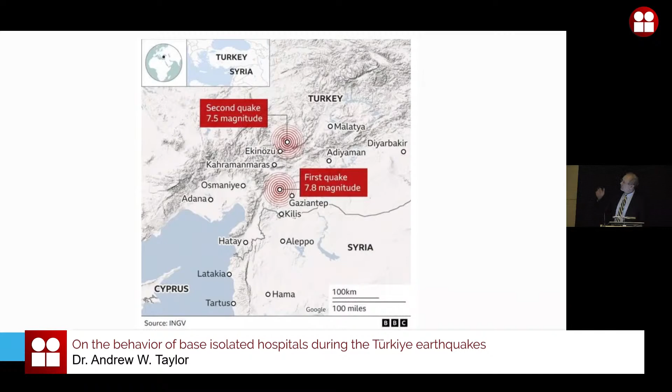So we all know there were two main events. The first earthquake was 7.8 magnitude, and the second, about 9 hours later, was 7.5 magnitude, as shown on this map.

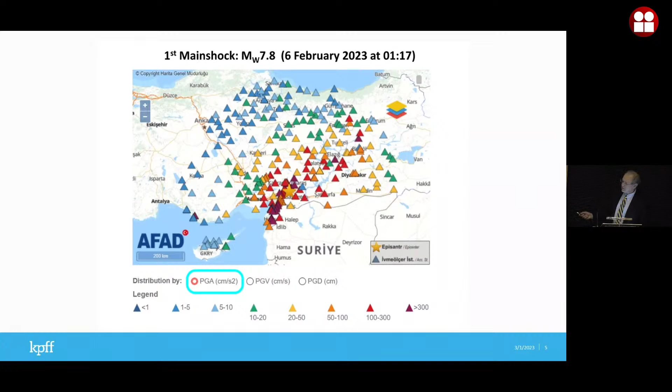In the first earthquake, magnitude 7.8, if you focus on the dark red triangles, these represent centimeters per second squared. Between 100 and 300, or 0.1 and 0.3 G, and even greater than 0.3 G, we see many instrumented locations that measured these very high accelerations. In the second event, magnitude 7.5, we also see many red triangles in the range of 100 to 300 centimeters per second squared or greater. This gives us an idea of how extreme the event was.

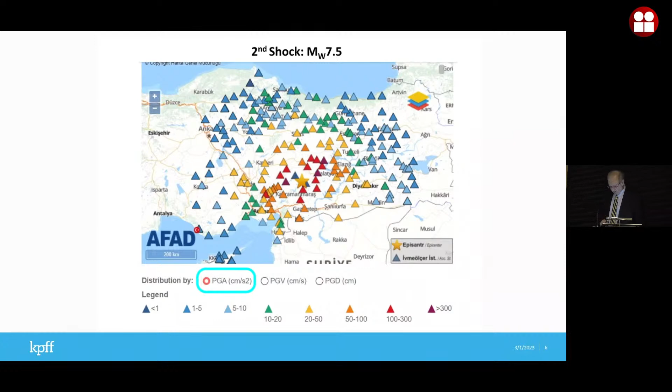I was very interested to learn how isolated buildings behaved in this extreme event. These are numbers from different seismograph recording stations, specifically the 10 closest recording stations to the main event, the first earthquake. We see peak ground acceleration in the north-south direction, east-west direction, and the up-down or vertical direction.

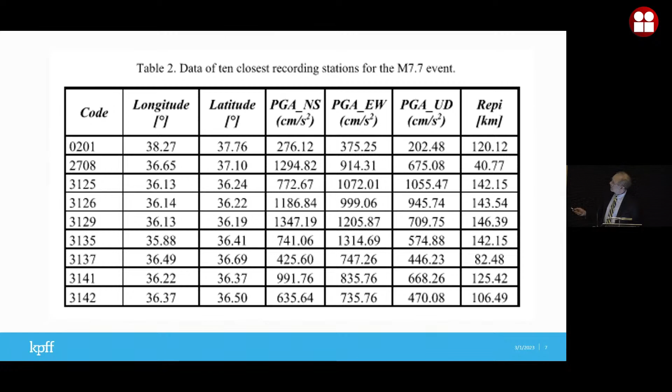I want to draw your attention particularly to these numbers: 1.3 G horizontal acceleration, 0.9 G horizontal acceleration, and 2/3 or 0.675 G vertical acceleration. Here we even have, in one instance, a vertical acceleration greater than 1 G.

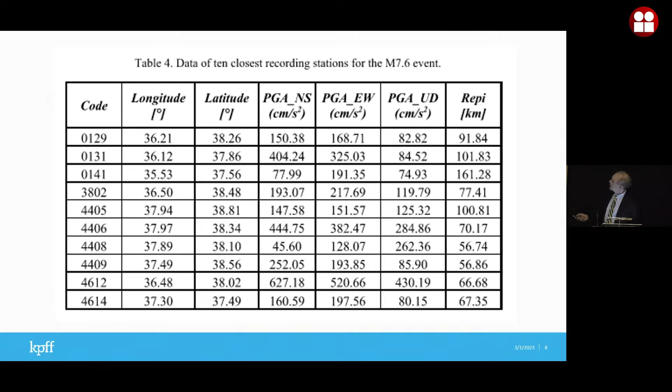In the second event, we see numbers not quite as high, but still very, very large. For instance, in the north-south direction, we have accelerations as high as 450 centimeters per second squared, and 325 or 520 here. Up-down again, we have quite high numbers, 0.43 G vertical, and so on. So this just shows we are dealing with a very, very severe series of events.

I'm only going to show two acceleration response spectra here, but they illustrate how this event compares to the Turkish building code, the 2019 Turkish building code. The green line is the event with a mean probability recurrence interval of 475 years, and the red line is for 2,475 years. We usually call this the 500-year earthquake and the 2,500-year earthquake. These are the design spectra for the 2,500-year event and also for the 475-year event.

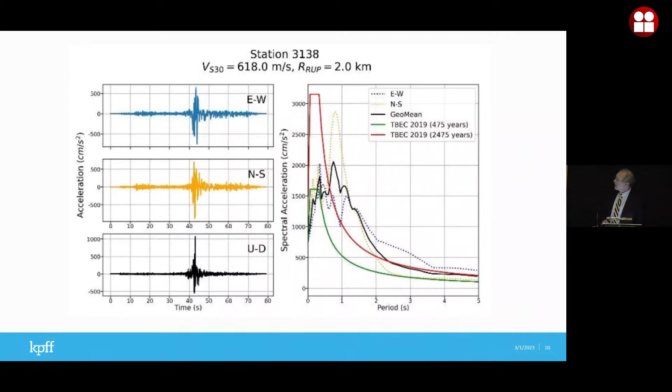Finally, some spectra here for the purpose of comparison. These again are acceleration response spectra, at one station, and at several stations — I think maybe there's 1, 2, 3, 4, 5, 6, 7, 8, 10 recordings here. On top of that, I have some other lines which I'll describe in a moment. These 10 recordings show that, for instance, some motions had very high horizontal accelerations out at periods as high as 2.5 seconds. In the other direction, north-south, east-west, we see again very high response around 2 seconds.

Now this may look somewhat familiar to you because of the basin or geologic effects in Mexico City, where the natural periods of the site are further out than you would normally have for a more competent soil. So what we see here is a response at long periods, which is somewhat unusual.

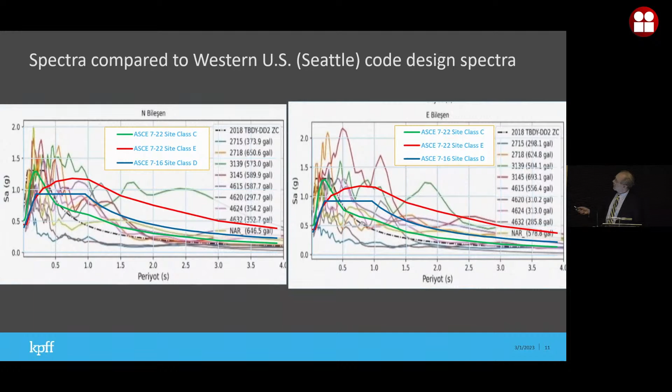I plotted on this plot also 3 design code plots. These are for the US code, for American Society of Civil Engineers, ASCE 7-2022, and also ASCE 7-2016. Site class D is an average, firm soil, not the best, but still a good soil condition. Site class C is very good soil condition. Site class E is almost the worst possible soil condition.

We see that for the Seattle area — of course I'm from Seattle, so I plotted these for Seattle — the design spectra in the United States, the blue, red, and green lines, also fall below the actual recorded motions by significant amounts in some cases. Site class E is a very, very soft site, and the design spectrum is quite high, especially at long periods. Even so, these recorded motions greatly exceeded the US design spectrum, at least in the Seattle area.

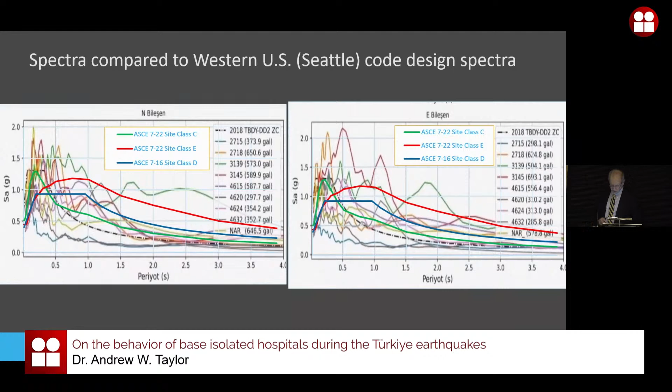A very early report came back from the Earthquake Engineering Research Institute reconnaissance team stating that generally hospitals, at least newer hospitals, behaved well in the earthquake structurally, but many of them were observed to be non-functional because of non-structural damage. Non-structural damage results from high accelerations in the building and from high distortions or drift in the building.

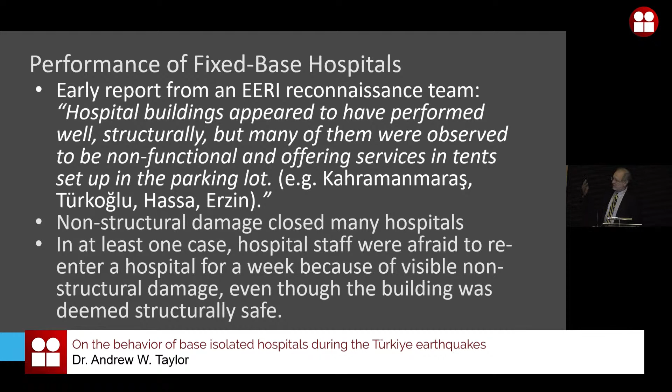Many hospitals were closed because of non-structural damage. In at least one case, the damage was determined to be non-structural, but it was very visible, and the people working in the hospital would not return into it, even though it was safe from a structural point of view, because of their concern about the non-structural damage.

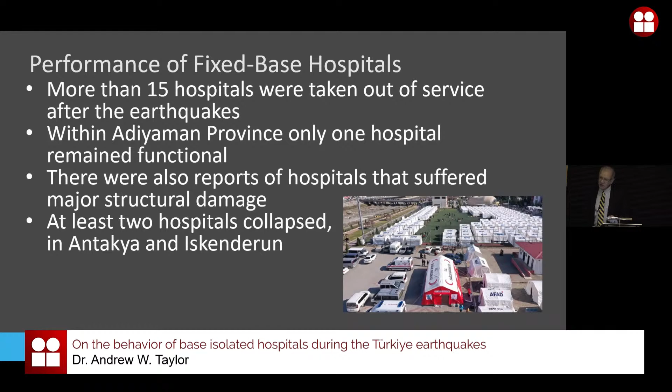Immediately after the earthquake, more than 15 hospitals, and perhaps many more, were taken out of service and became non-functional. In one province, only one hospital remained functional. There were also reports of hospitals that suffered major structural damage. So although most did well, some were damaged structurally quite severely, and at least 2 hospitals collapsed.

Very often hospitals were abandoned, and temporary or field hospitals were established out in the parking lots. This is the field hospital at Hatay, and the actual hospital, which is empty, can be seen behind the tents here. This is another view of the same hospital.

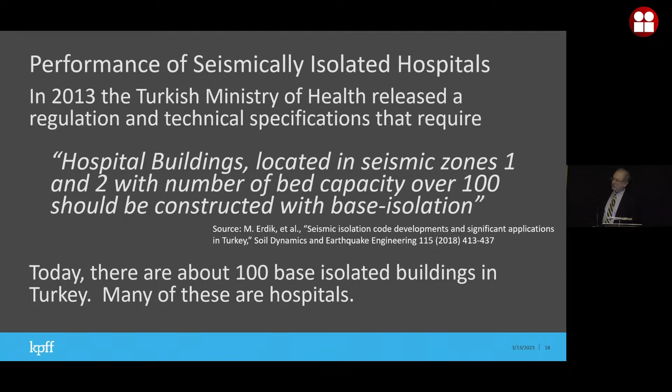Now let's look at isolated hospitals. There was a rule established in 2013 by the Turkish Ministry of Health that required essentially most large hospitals, over 100 beds, which is not a very large hospital, but in seismic zones 1 and 2, the most severe seismic zones in Turkey, to be base isolated. My understanding is today there are about 100 base isolated buildings total in Turkey, and many of these are hospitals because of this ruling in 2013.

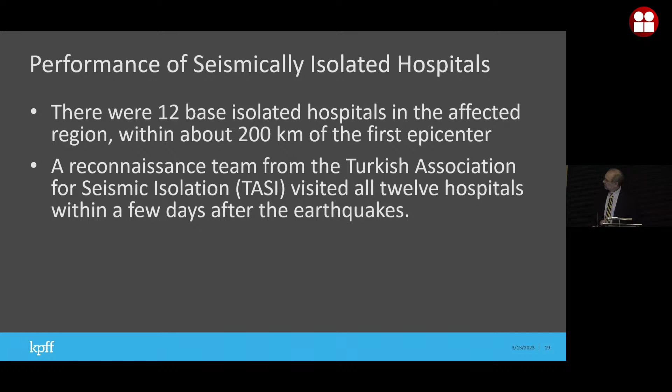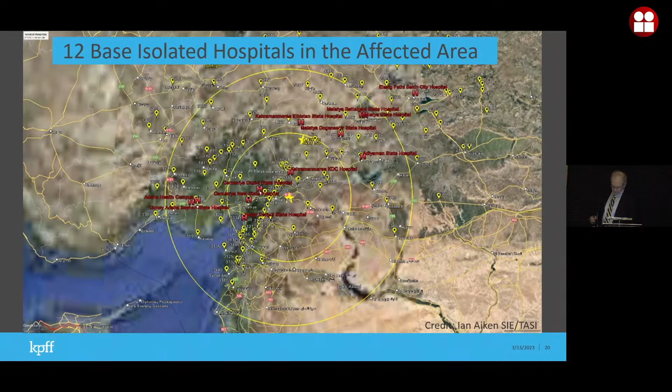In the region affected by the earthquake, there were 12 base isolated hospitals within about a 200-kilometer radius. A reconnaissance team from the Turkish Association for Seismic Isolation, or TASI, was able to visit all 12 of these base isolated hospitals within a few days after the earthquake. Some of the information I have comes from that organization. Here's a map showing the base isolated hospitals in the region, with circles at 100 kilometers and 200 kilometers. The red labels are the 12 hospitals that were base isolated and affected by strong ground shaking.

Looking for sources of information, I found one news source that reported that at the time of the earthquake, there were actually 3 base isolated hospitals under construction in the affected area. These were government-owned facilities at 3 locations, and despite being only partially constructed, they were reported to behave very well, even though they weren't complete. One example is the Kahramanmaraş Hospital, which we'll see here in a moment.

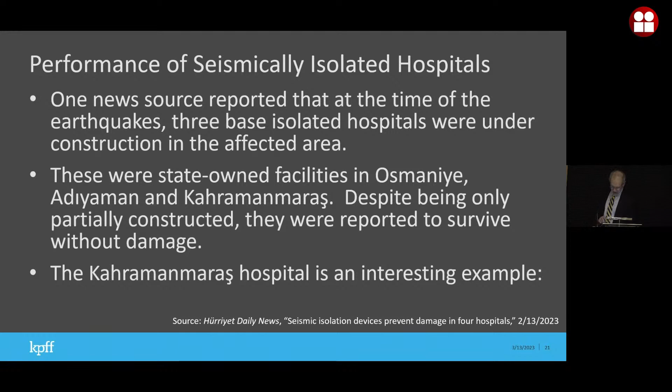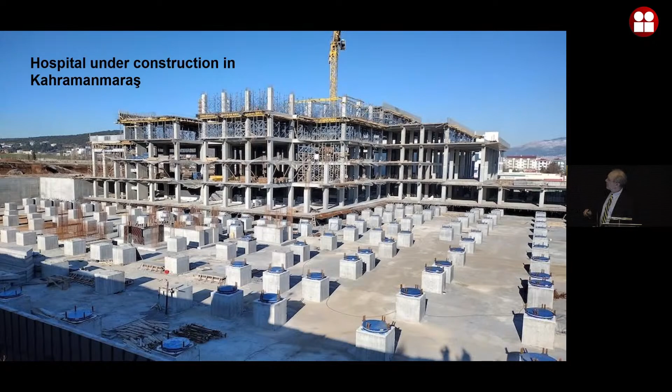This was under construction. You can see the base isolation system at the lowest level, also under construction. This is a friction pendulum system, or dish system, with 2 dishes, one below and one above. This portion of the hospital actually performed very well structurally during the earthquake, even though less than half of the hospital was completed. So that was encouraging.

Even though this hospital was under construction at the time of the earthquake, with the isolators locked for construction, during construction there are plates on the isolators that hold the isolator in position. These plates broke away due to the ground motions, and the building did very well.

But perhaps equally as interesting is that a portion of this hospital, constructed 12 years ago as a fixed base structure, did not perform well, and it was immediately next door. So here we have a case of a base isolated under-construction hospital, and a completed fixed base hospital that's not base isolated, tested by the same earthquake—one performed very well, the other performed very poorly and had to be abandoned. This is a very interesting observation of base isolated versus non-base isolated portions of a hospital being tested by the same earthquake.

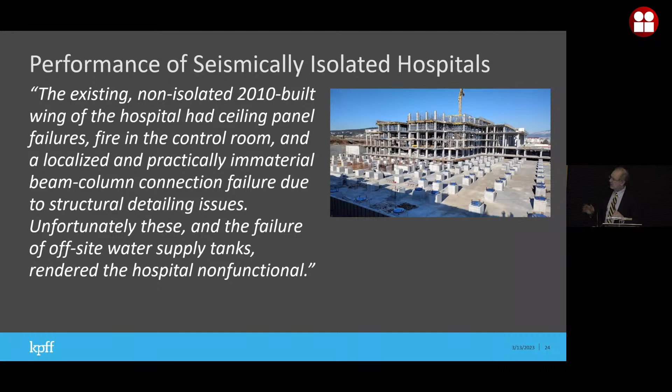So you may wonder, naturally, the question arises: how much did the base isolated hospitals move? What was their range of motion? According to the early report from the Turkish Seismic Isolation Organization, the maximum seismic movement ranged from quite small, 1 to 2 centimeters, up to as high as 16 centimeters.

The photograph shown here is actually from Japan. It's beneath a building in the Sendai, Japan area after the 2011 earthquake. This is a device that records the path of motion of the isolated structure above relative to the non-isolated structure or the foundation below, and it creates a scratch on the plate. You can see in this case in Japan that the displacement was about 23 centimeters. This is the maximum displacement here.

So when these types of very simple devices are in place, we can at least determine the main directionality of movement and the maximum displacement. We can't always determine the details of the motion at low displacements, but we can at least see what the maximum is.

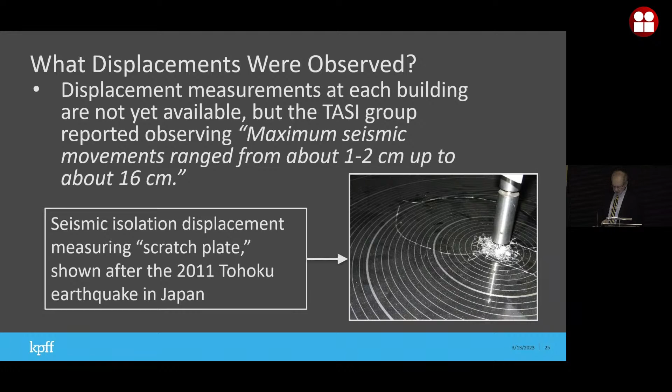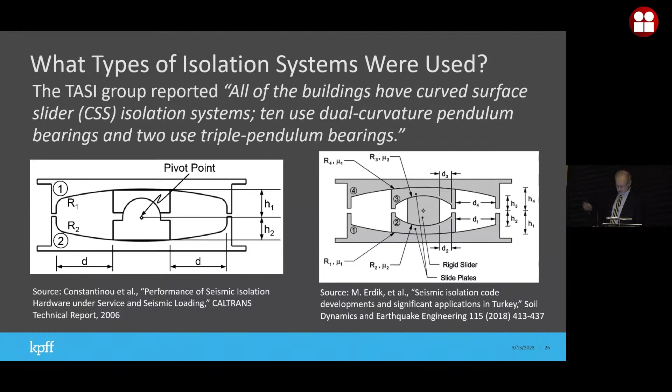What kinds of devices were used? In all 12 hospitals, they were sliding devices like this. There are isolated hospitals in Turkey on rubber isolation bearings. It happens that in this event, all of the hospitals had either a double concave surface, or double friction pendulum bearing, or I think 1 or 2 of them had triple friction pendulum bearings like this. So these are the type of devices that were tested in these earthquakes.

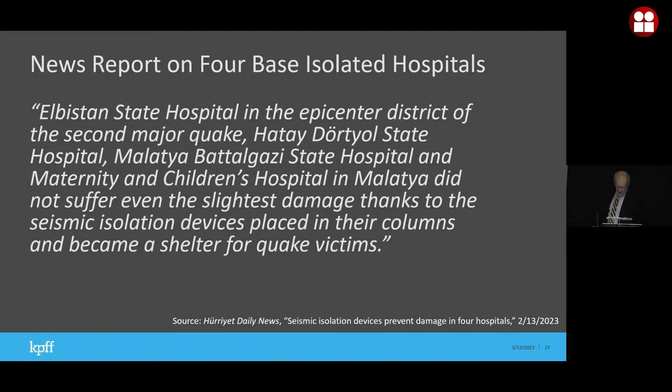Also in the news, there was a story on the 13th, only about 7 days after the earthquake, reporting that 4 base isolated hospitals performed extremely well. According to the news report, they did not suffer even the slightest damage thanks to the seismic isolation devices placed in their columns, and they were effective at treating earthquake injury victims.

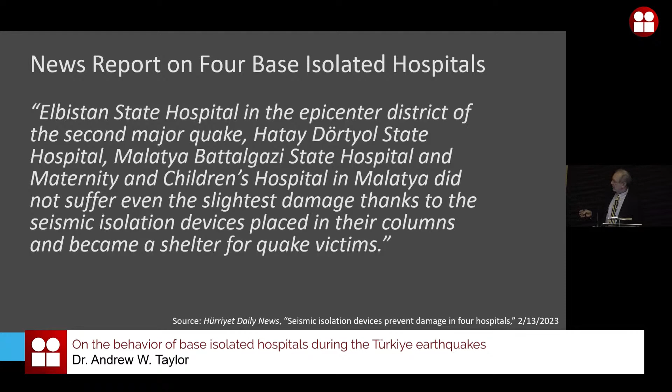I think it's interesting that this is a general public news report. This isn't an engineering investigation or an engineering society's assessment. This is in a local newspaper in Turkey, a few days after the earthquake. So it is in the consciousness of people in Turkey that seismic isolation is an effective earthquake damage preventative measure.

So we know some information now, which I've presented. It would be nice to get more information, and I think we will. Eventually, I hope we'll see more detailed inspection reports of the 12 isolated hospitals that I showed earlier on the map. One of the hospitals did have instrumentation within the building, so we'll actually see the recorded earthquake response of the isolated hospital.

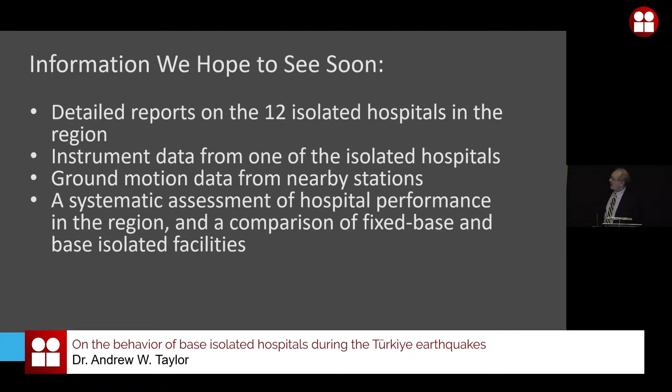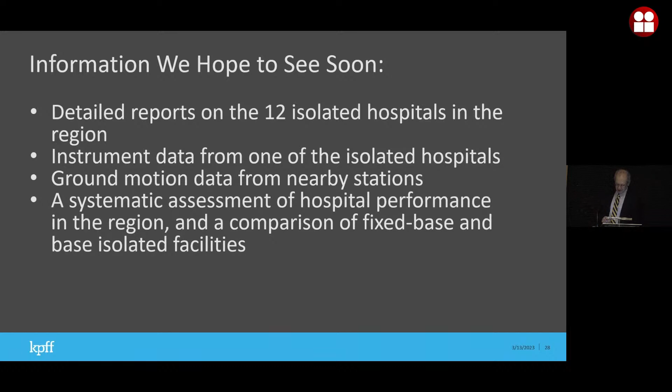But we will also see ground motion data from nearby measurement locations. We have already seen much of that; much of it has been processed and released. But we may be looking more closely, for the hospitals that did not have instrumentation, at comparing their response to the recorded ground motions nearby. And I hope eventually, and I'm sure we will, see a systematic study of the earthquake response of fixed base and isolated structures following this earthquake. So this is what I hope for the future.

Now I want to shift gears here quite a bit. I wanted to show you an actual seismically isolated hospital project. This is one that I was involved with in Taiwan, but I thought you might be interested in looking inside an actual engineering design of a seismically isolated hospital.

So I just want to show a few slides about this in case you're interested in a real world example. So I was responsible for the design of the seismic isolation system. The superstructure, we were involved in the design, but the main design and responsibility was by a local firm, the Taiwan Engineering Consulting Group in Taipei. Architect was C.C. Xu, also in Taipei, and the facility is owned by a Buddhist relief charitable organization, the Tzu Chi Foundation.

This is a picture of the completed facility, 1,200 beds, very large floor area, 167,000 square meters. At the time that this was completed, it was the largest base isolated hospital by area in the world. However, several hospitals in Turkey are larger than this. Very heavy structure, you can see,

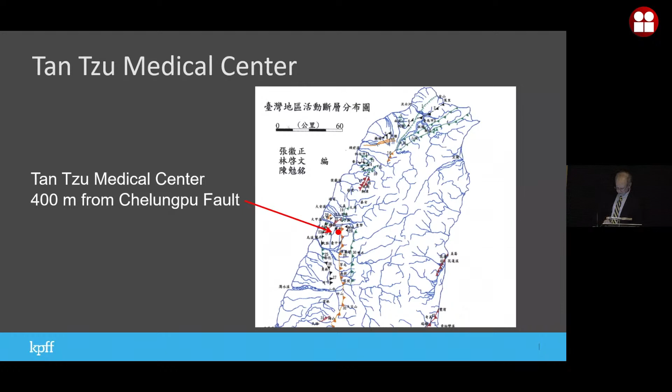This is the location, which was the most challenging thing. In 1999, there was a major earthquake in Taiwan called the Chichi earthquake. It ruptured the Chelungpu Fault, and here's the fault, and here is the hospital, 400 meters from where that fault ruptured. At very near the location of the hospital, the Chelungpu Fault had an uplift, a step of 3 meters. So very severe conditions and a very challenging location to put a hospital that is intended to provide emergency relief. So of course base isolation was selected.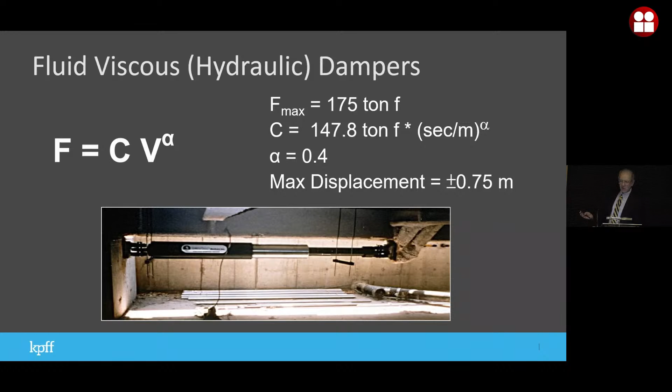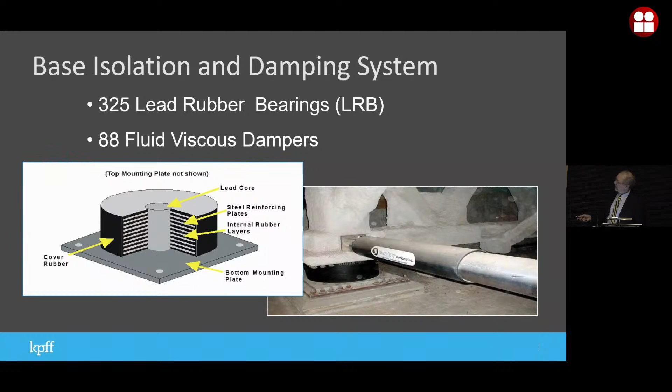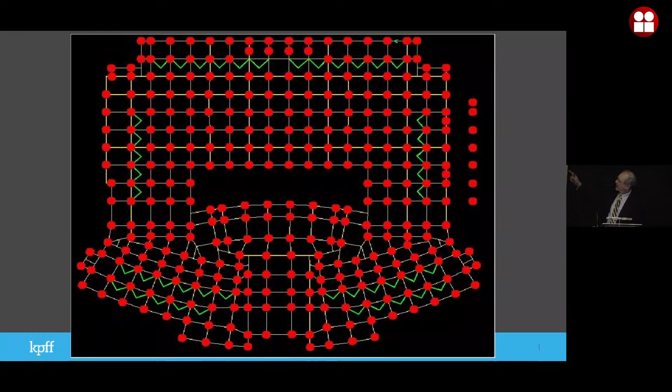Here's the system altogether. Consists of rubber bearings in this case with a lead core to provide additional damping. And then we have even further damping, viscous damping through this type of damper. There were 325 lead rubber bearings, sometimes called LRB, and 88 of the hydraulic or fluid viscous dampers. These were arranged, this is a plan view looking down. Each red dot is a seismic isolation bearing, a rubber bearing, and each green V shape represents 2 of those hydraulic dampers arranged at 90 degrees to one another. So there's a total of 88 of those dampers around the perimeter of the base.

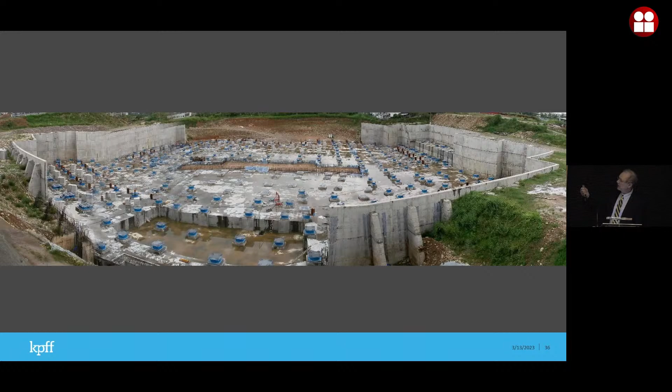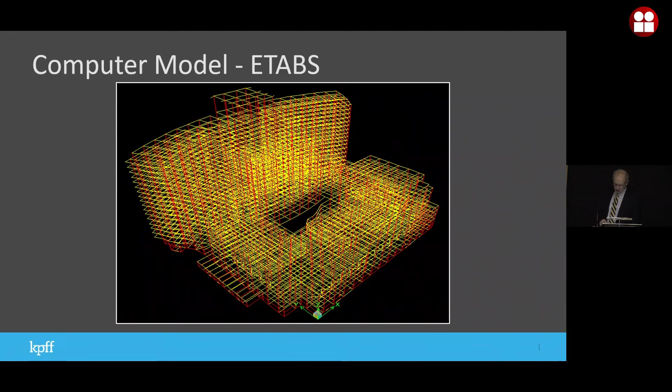This is what the actual construction site looks like. You can see here the isolators in place. And also around the perimeter, there are columns and hardware for connecting the dampers between the superstructure and the substructure. This is the ETABS model. We performed a nonlinear time history analysis. The only nonlinear elements in the analysis were the isolation devices. The superstructure remained elastic, and we verified that during our analysis.

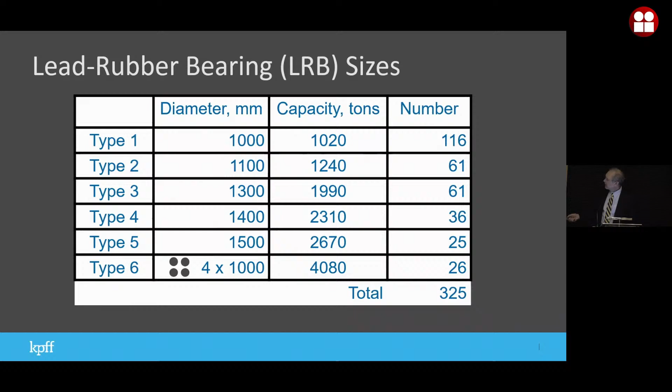Here's just a summary of the base isolation bearings. There were 6 types. Actually, there were 5 types, varying in diameter between 1 meter and 1.5 meters. These are their vertical load carrying capacities in tons, and this is the number of bearings of each type. For some very heavy loads, we put together four 1 meter diameter isolators in a group to support as much as 4,000 tons axial load.

Here I am in front of some of these dampers, which again, their total capacity, I think, was around 175 tons force capacity. This is at the manufacturing plant actually in New York.

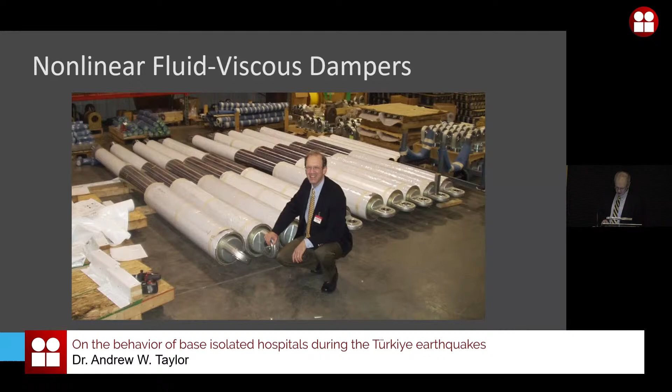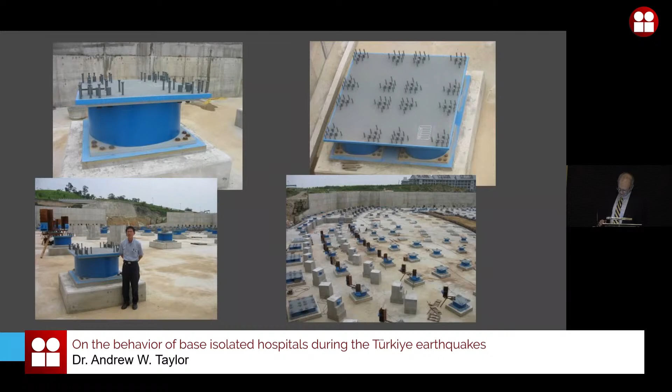In terms of performance, the peak ground acceleration for design for the 500-year earthquake was about 0.4 G, and for the 2,500-year earthquake, the peak ground acceleration was about 0.5 G. These are the displacements that we calculated for these two events, 0.34 meters and 0.6 meters.

The base shear above the isolators was reduced. If you compare that, for example, to the peak ground acceleration, we see that the base shear was 0.12 times the weight of the building, or a reduction of about 1/3, comparing this base shear above the isolator with the peak ground acceleration.

And then the interstory drift, which is very important for non-structural components, that is the displacement of one story relative to the other, was quite low, on the order of 0.2% of the height. So the displacement was only 0.002 times the height. And this is very important in a hospital because if you have a pipe that breaks or some other system that fails, it can completely close the hospital, as we saw in Turkey. So having these low interstory drift ratios is important.

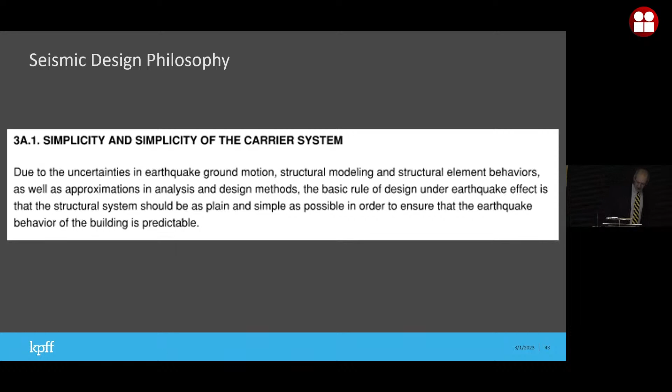Any question? Thank you for the presentation. It is actually a very technical question. You said that there were 26 base isolators that had the capacity of type 1. Yes. I would like to know what caused that concentration of force, if there was some effect of torsional effects, and if it is so, how did you deal with it in the design?